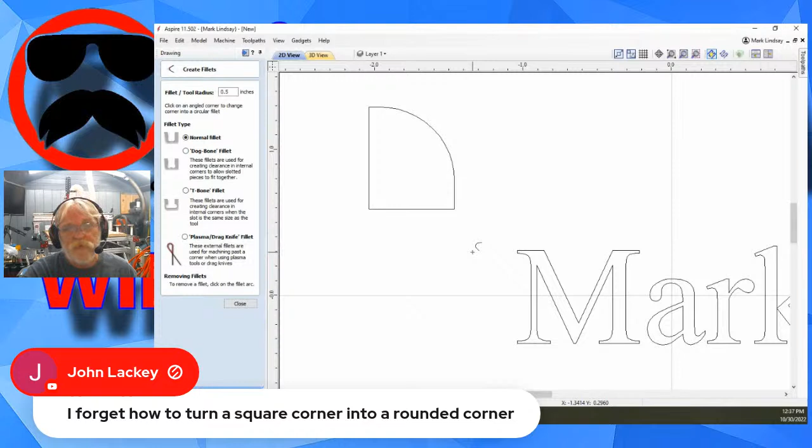I don't know if you can see it or not. Let me go to another corner. Yeah, there we go, you can see that check mark appear underneath the cursor. That's telling me it can apply that radius to this corner. Then I click it, and there it is. Now, obviously, I'm not getting a check mark here because this radius is too tight - it wouldn't work. I'll get a check mark here, but this corner is too small for a 1/2 inch radius, it would come way out over here. So just know that. But that's basically how you add a fillet and round off. Remember, in the fillet tool you're working with a radius, not your tool diameter - it's the radius you want that arc to be. So that's the simple way.

Let's go back over here to live.

Yeah, Todd says make that radius with sandpaper. Been there, done that. Got the t-shirt. It happens to all of us, John, and the older I get, the more likely it is to happen and the more frequent. See, just right now, I couldn't remember the word frequent.

So let's see, Marie Wood has a question here. I'm making a bowl with a raised anchor in the middle. For the zero plane, would I select U or N? Okay, you're talking about the combine mode.

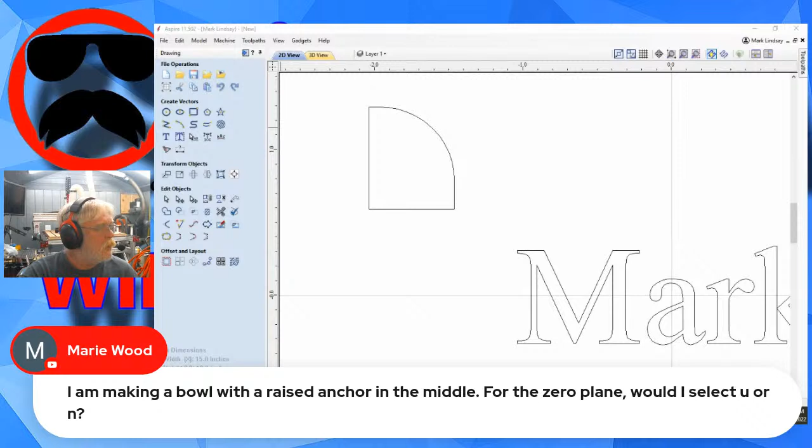Let's jump back over, I'm still in Aspire. Let's just go into the modeling tab. I don't think I'm going to a 3D view, and you're talking about adding a zero plane. So let's add it here. And if you look, the zero plane has, I guess you'd call it, the N shape. The zero plane, when you're doing a bowl or a dish, is basically there to help you with the outside surface area, to help fill in any roughness, ragged edges that are left over by pixels that are perceived as being cut deeper. So you would leave it as so.

You leave it as such because the zero plane should be at the surface of the material. Now, having said that, remember that when you use a zero plane, you are making the entire surface a part of the 3D model. You can regulate that or control that by applying a vector around the dish, around the bowl. So when you go to machine the bowl, you're not machining the entire surface. You cut to a limiting vector, but you're making your entire surface of your material a part of the 3D model. That's also why you want to make your work material as small as you can.

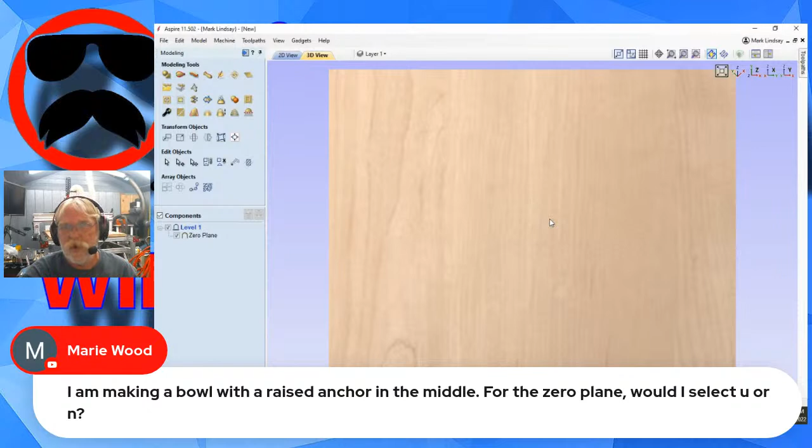Like, for instance, if you're putting a 3D model in the corner of a full sheet of plywood, you don't want your full sheet of plywood represented in this model here. If it's going to be a 3-inch by 3-inch model on a full sheet of plywood, size your material accordingly. And then just make sure you have it placed where you want it on the outside on the CNC. So I hope that made sense.

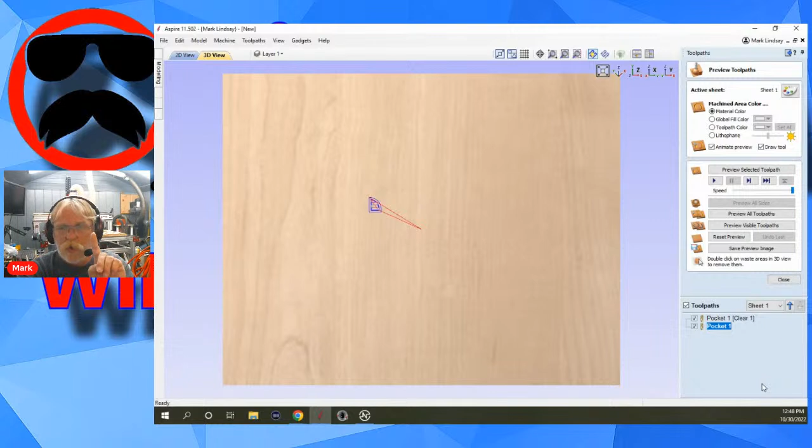So what I'm suggesting is that you go down your toolpath list here and see if you have 2 toolpaths.

Now Mike is saying, I have used the vector validator, there are no problems with the objects. It carves in one direction and then the opposite direction a little larger.

Okay, is this a 3D or a 2D toolpath? What type of toolpath is it? That does matter as well. Okay, oh okay, I've deleted all of the toolpaths and only made a toolpath for that item and it still does it. Okay, is this 3D or 2D? Because there is a difference there.

Oh man, so let me see. 2D flat object, okay. When you get into creating, for instance, this pocket toolpath I have here.

Are you going with offset or raster pocketing? Now the raster, for instance, is only going to be a clearing because I'm using 2 different bits. But if, for instance, I remove that bit and I'm going to cut the entire thing, this entire vector with one bit, what it's going to do — if I do it offset, it'll come out here and start in the middle and then just clear it all out. If I'm using raster, we have a profile pass.

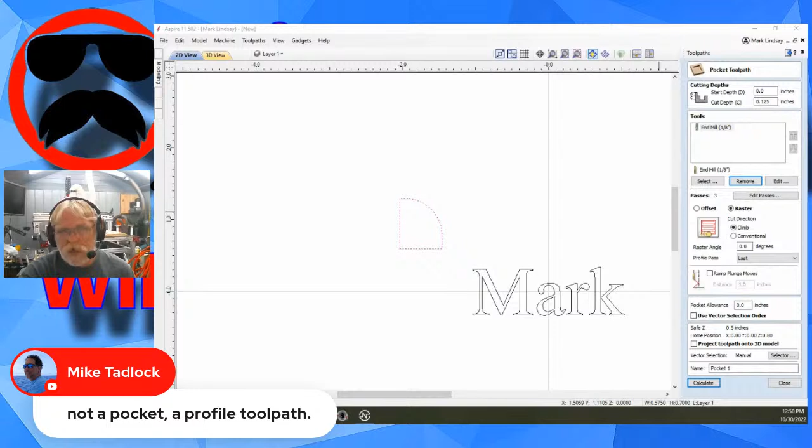That can be done first or it can be done last — not a pocket, a profile toolpath. Okay, even easier, close. On a profile toolpath using that same one, are you cutting outside, inside, or on?

Do you have an allowance offset? Do you have separate last pass checked? Do you have the allowance entered here? There are various things that can affect where the bit is going to cut.

For instance, let me make a little bit bigger. Let me close this and make a bigger vector out here. Oops, 2D. First of all, let's get rid of all this here. So I'll delete that and come out here and do this.

All right, now I want to carve that profile. So I want to cut the profile toolpath. Now you're saying it's cutting this twice, but it's cutting it a little bit larger. Wow, that doesn't make any sense. Are you sure? No, that still doesn't make any sense.

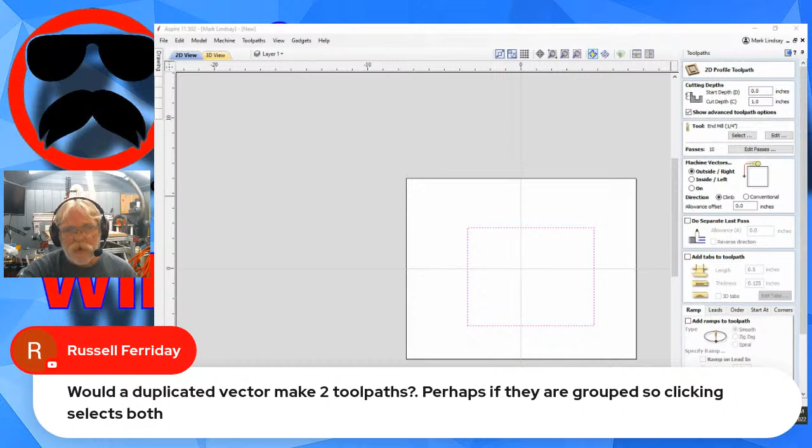If you're cutting to the outside, it does. It sounds like we've got people here saying, would a duplicate vector make 2 toolpaths? Perhaps if they're grouped, so clicking selects both. That's what I'm thinking, and Bob jumping in as well.

If you have... okay, let me close this here. And I'm going to do something you shouldn't do. I'm going to Control C for copy, then Control V for paste. So I have two vectors. Now I select them both.

If I come up here and I create — let's go outside, no offsets or anything like that, and calculate. Did you get, I don't know if you've got that error or not: ignoring duplicate vectors. Have you looked to see if there's a duplicate vector?

Let me close this. Select, right click, selection, select all duplicate vectors.

Then delete one of them. Only one tool path cuts it one direction and then cuts the opposite direction. You're sure that's a closed vector?

Oh, wait a minute. Wait a minute. Okay, let's see here. Node editing. I'm going to cut the vector right here. Then I'll come out of node editing. Now,

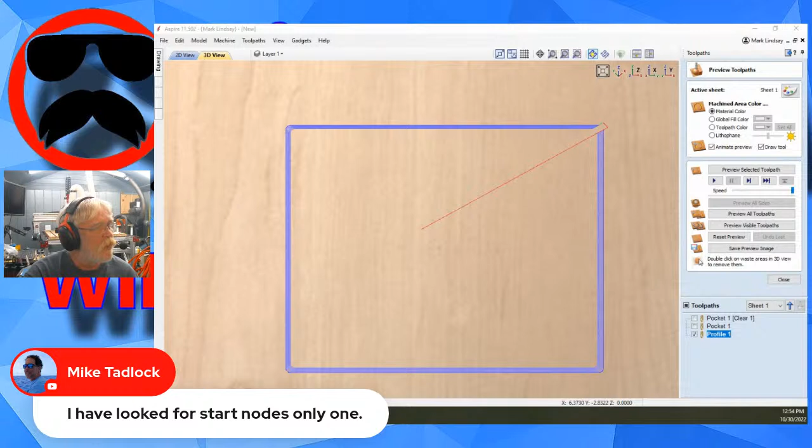There's only one. Well, it doesn't have to be now. It doesn't have to be only one. Well, yes, it would have to be only one start node. I don't know. This is mystifying, Mike. I've not run into this. I have not run into this.

Now, what I have run into is, and I did this wrong. So let me close this and uncheck this. Go back into node editing so that I have two separate vectors.

Continue. You got no error messages or anything.

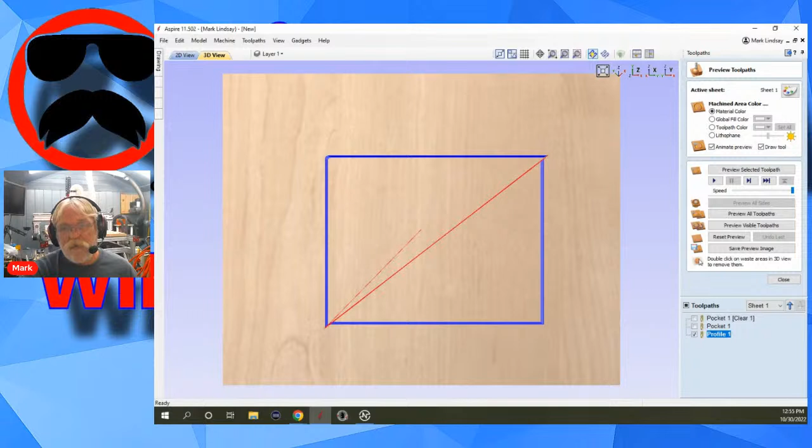Well, see, Mike, I don't have an answer. I've never run across this. I have never run across this, with the exception of if I have two open vectors that looks like a joined vector. But if you are, let me uncheck this.

And it's not a question of paying for my time or anything like that. If you've selected them, gone into node editing, well, see, I only have one start point here. So, you know what I mean?

Okay, you're saying it's making two passes, then two passes in the opposite direction. That's what I'm getting at. If you look at, come out of node editing, if I select like so, I've only got one start point.

But if you look up here at the arrows, I've got two different, that's two start points stacked one on top of the other. I've got two different directions being indicated. You see what I'm getting at?

So it looks like one closed vector, but it's not, because again, I have this arrow indicating the cut direction is going to be this way, and this is going to be cut direction for that way. So it's not making sense.

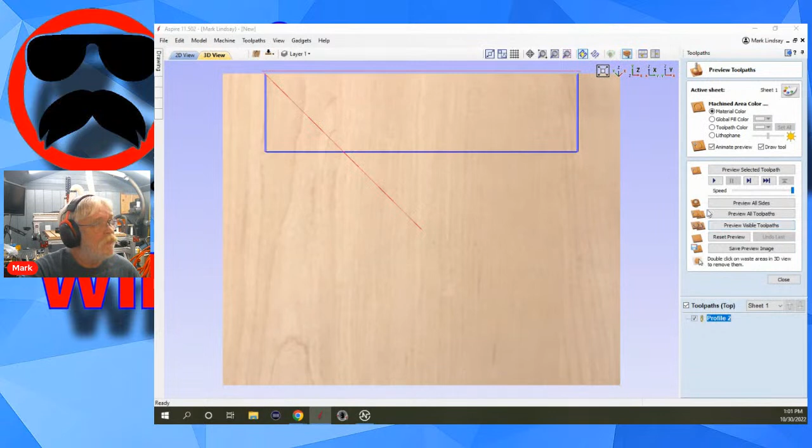Now here's the problem that he ran into. I'm fixing to run long here, but let's go ahead and do a profile toolpath, inside left, and we'll go with 0.5. I don't remember what the thickness was. We will calculate it, then preview it, close, flip over to the other side, and do the exact same thing. Calculate it, preview it. Oops, let's preview all sides.

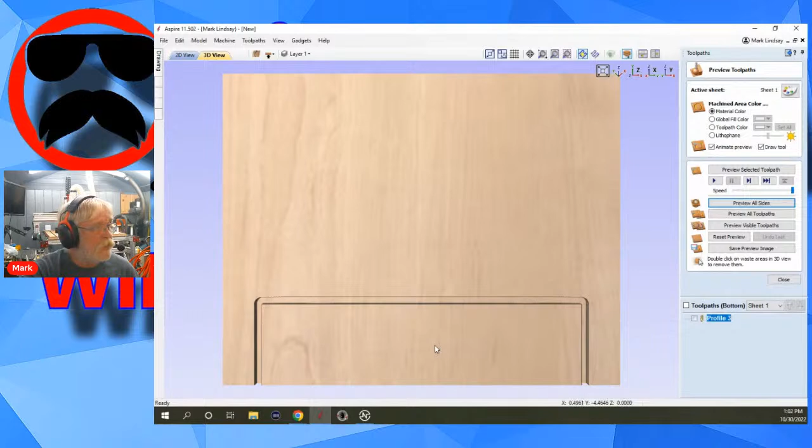Okay, and if you look, they don't match up. They don't align. Okay.

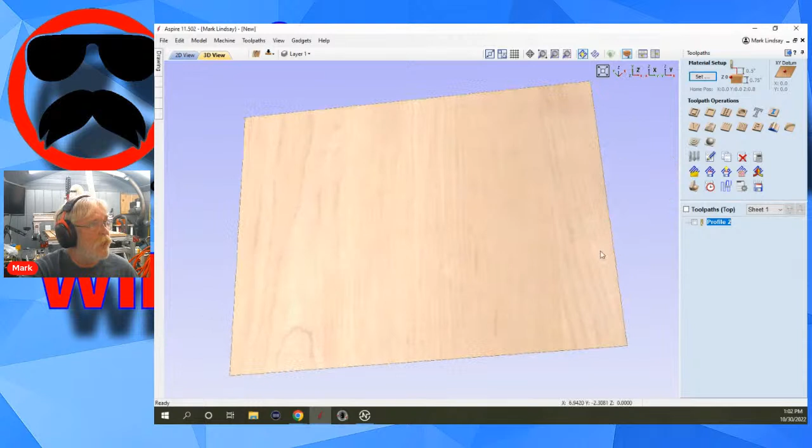It turns out what's going on is if you look at the vectors, go back to a straight Z view. If you look at the vectors, and we'll click on Node Edit, here's my starting point. My start point is over here. And in this toolpath, I told it to cut inside to the left of that vector, so that when that bit comes in, it's going to cut to the left side of the start point.

Let me close this. If I flip over to the bottom, select it, go into node editing, it's over here. The toolpath is going to go to the left of that start point. So come out of node editing. If I select that toolpath, put a check mark in it, you see where the bit's going to cut to the outside of the vector. It's cutting to the left of the start point. It's cutting to the outside of the vector.

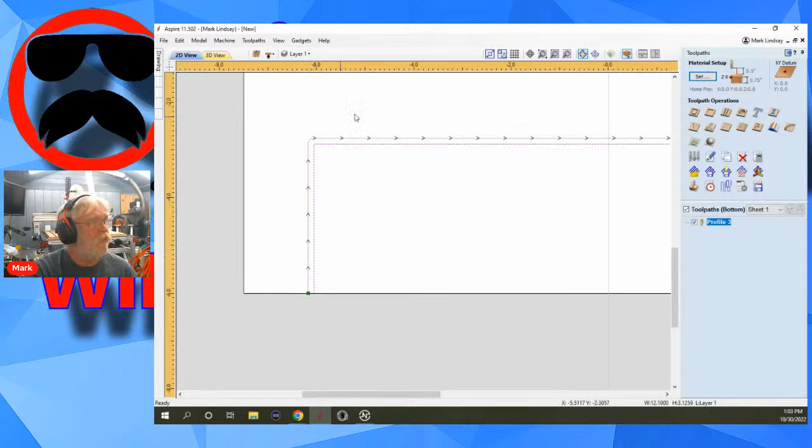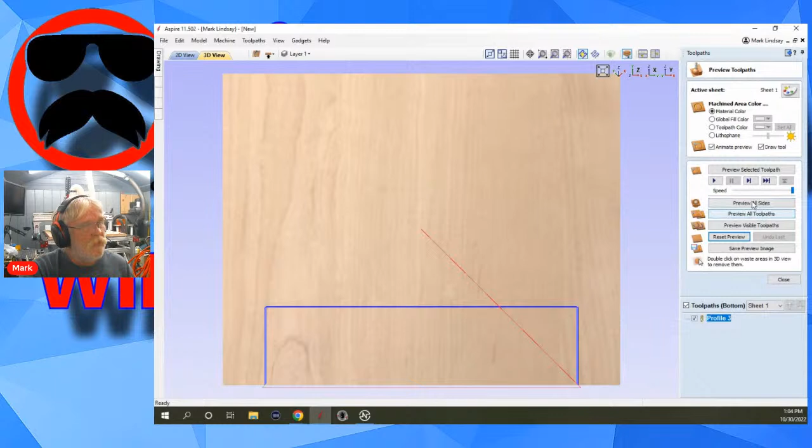But if I switch over to the top, it's cutting to the inside. So what you have to do, for instance, is make sure that the vector start points are in the same place. So to fix that, he had to go into his bottom one, then come over here in node editing and make that the start point. Come out of node editing, then recalculate the toolpath. Then it would work fine. Preview all sides. Then it worked.

So I don't know if you have something like that going on or not.

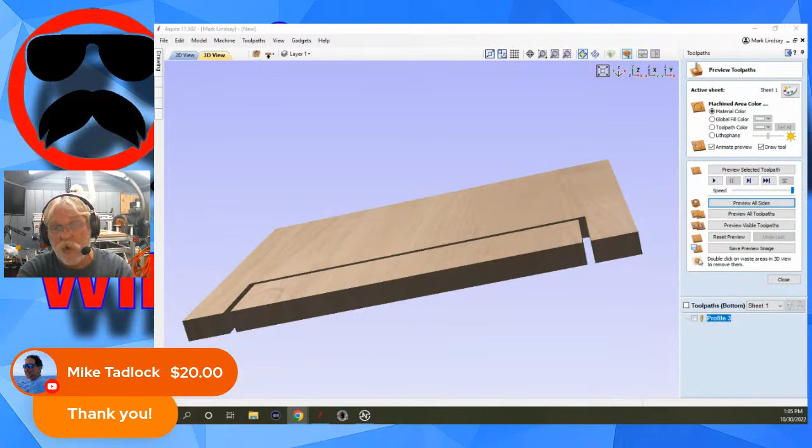Just for giggles, you have nothing to lose except the time it takes you to do it. Select all those vectors and see if you can join it. See if you can join the, it makes no sense why it would do that, you know? But thank you again very much for the super chat.

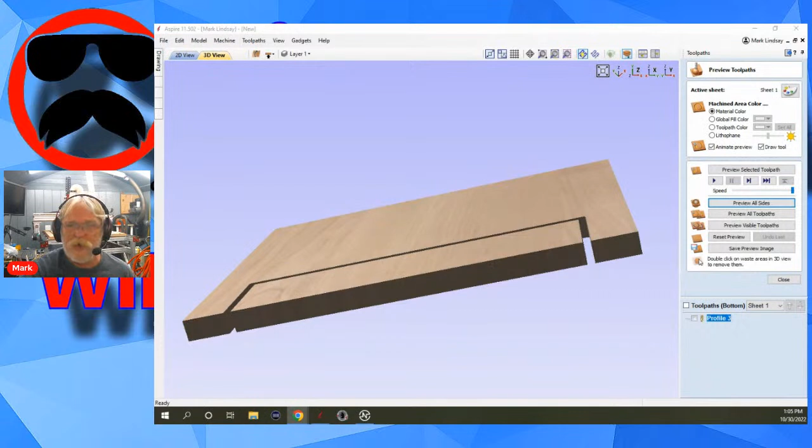Wow, that is a stumper though. And when you get a solution, please share the wealth. Let us know. You have tried to join them. Wow, that doesn't make any sense at all. It doesn't make any sense at all. Wow.

Okay, JC, one last comment here, not relevant to current discussion. Very little of what I say is, but I drilled and added steel dowel location pins to my spoil board this week. What a great way to accurately locate X and Y repeatedly. Thanks for the tip. I'm telling you, you're very welcome, JC. I absolutely love that, and that is my go-to now.

I'll put it to you this way. I just finished, like I said this morning, surfacing the real pirate video in leopard wood, and I didn't use the three-way touch plate to set X or Y one single time. I set it once when I first set up that fixture in the corner with the holes and steel dowels. I used the touch plate to set my X and Y 0 one time, and I've not touched it since. All I have to do is go into my offset screen, click on apply G59 offset, then go to work XY0, and boom, it's done. I used the touch plate to set Z0, but that's it. So, okay.